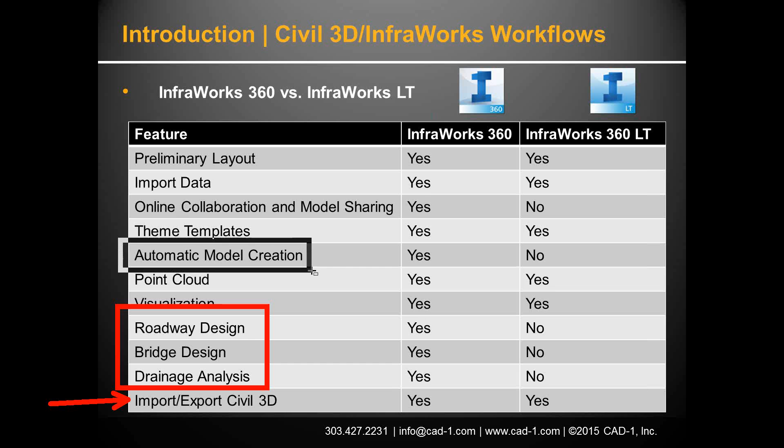Another thing is this automatic model creation - that's the model builder tools. And if you want to share your model with other folks, you have to have InfraWorks 360 for that as well. But we're focusing down here at the very bottom, that last piece, the import-export with Civil 3D, and you should be able to do that with no problem in the LT version.

All right, so let's see where do we want to go from here? What can we do? Well, we've got this two-way workflow. We can go from InfraWorks to Civil 3D - so I can take my InfraWorks model, maybe I'm doing some preliminary layout in InfraWorks, and I want to take that into Civil 3D. I can open an InfraWorks model now in Civil 3D. Additionally, once I've done my final, detailed design in Civil 3D, I can then take that Civil 3D data and push it into InfraWorks. So it is a two-way workflow here.

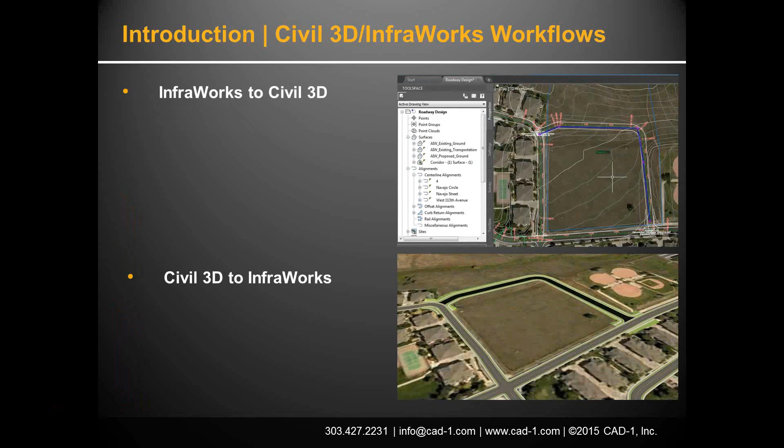So let's talk a little bit about going from InfraWorks to Civil 3D first. Just like everything else with Civil 3D, you want to make sure your settings are set correctly prior to doing this. There's a series of settings that allow you to control how things work as you're importing from InfraWorks into Civil 3D - we'll see those settings. You then simply open the InfraWorks model in Civil 3D; there's a command right there on the ribbon in 2016 that allows you to open it. You'll get this little dialog box, and basically you choose the model.

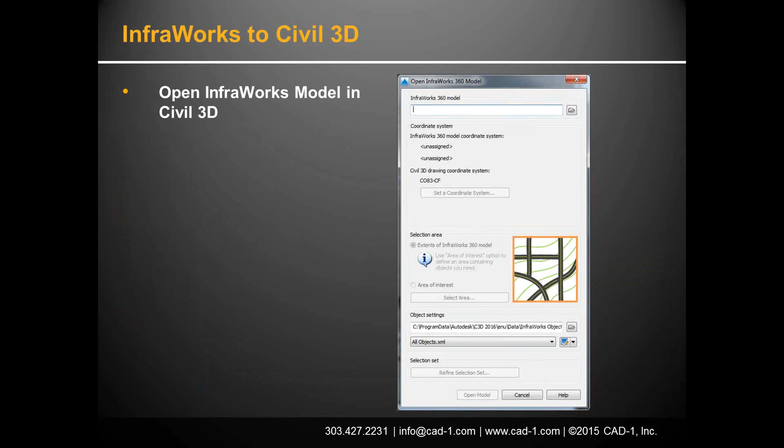You choose your coordinate system, and you choose what it is you want to bring in - whether you want to bring in the entire model or just a piece of it. So let's go ahead and see this, because I'm tired of showing you PowerPoint. I actually want to get in and show you the software.

All right, so here I am in InfraWorks. Here's my model. Let me go ahead and restore a bookmark here that shows you what it is we're going to be bringing in. All I did here is I just kind of sketched up some stuff. It's not a very real design, so to speak - it's kind of hokey, like why would you put a bridge there? There's no way I'd normally put a bridge there, but I wanted a bridge in my model so you could see what happens when it comes in.

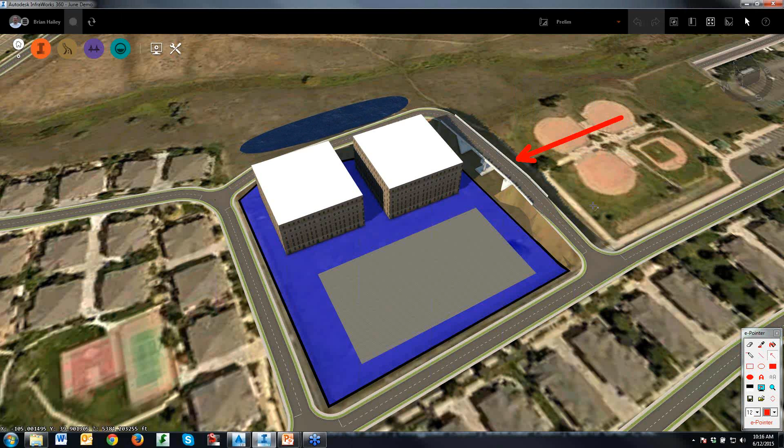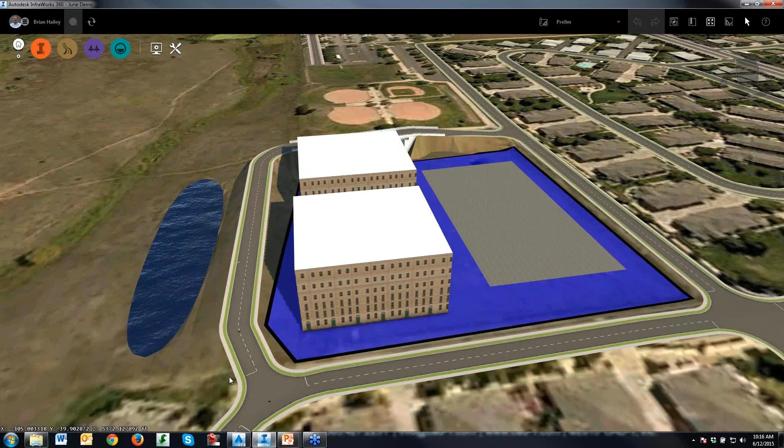I also have a drainage network here, so I just kind of flipped underneath the road here so we can see the pipes. I've got some buildings, I've got coverage areas, I've got a water area over here. So let's see what happens when we bring this in.

Oh, the other thing I've got is I have design roads in here, and I also have the preliminary roads. So the bridges, the design roads - that's all InfraWorks 360. The drainage network - that's all 360 too. The rest of this stuff, you could be done with InfraWorks 360 LT.

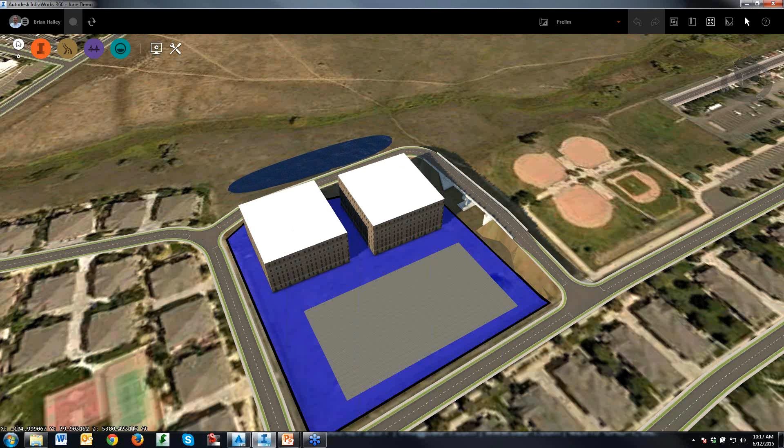So if I want to take this model into Civil 3D, the first thing I have to do is close the model. I can't have the model open and bring it into InfraWorks or into Civil 3D because InfraWorks locks the model. So I'll just shut out of InfraWorks here real quick, and we'll switch over to Civil 3D.

So let me go ahead and start from scratch here. I'm just going to start a brand new blank drawing using the default Civil 3D template. There's nothing special about this template in any way, shape, or form. And I simply want to go in and import that model.

Now, before I import the model, I want to double check my settings. So on the Insert tab, I have the set of tools for the InfraWorks 360 stuff. First thing I'm going to do is configure my settings. Under my settings, it brings up this little dialog box, and basically it says, okay, what data do you want to import? Over here on the far left, I can choose what it is I want to import and simply toggle those on and off.

Once I figure out what it is I want to import, over here on the right, I set it up. So for example, if I'm importing a terrain surface, I click on here and it tells me what type of terrain it is, or the settings in Civil 3D. If I click on this icon, it says, okay, what style do you want to use and what layer do you want to use?

Planning utilities - now, I don't have any planning utilities in my model, so it doesn't really matter, but I can come over here and set this up as well. Design roads, intersections, drainage networks - so I can come over here and set up my drainage networks to do this.

Now, the nice thing about this process is, if you're not familiar with Project Chameleon, this is a pipe network catalog type of thing where the parts are compatible in both InfraWorks and Civil 3D. So the way my parts are in InfraWorks will be exactly the same way that they are in Civil 3D.

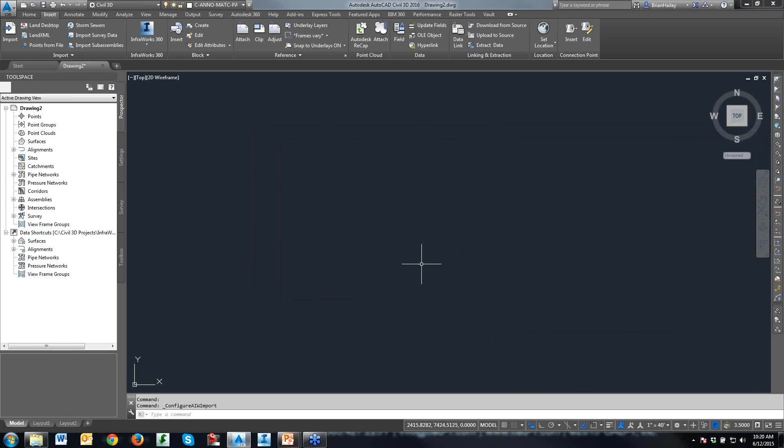And so I just canceled that. There is no... if I were to make a change, I can open up one. For example, the planning objects comes in specific ways. You notice the design stuff is turned off. If I open up the design objects, the planning stuff is turned off.

If I come in here and want to do a save as, I'll save this as Brian's import objects, and say, I want the terrain surface and the planning utilities turned on. I go ahead and save this, and hit OK. Oh wait, I wanted to make a change to that.

I go back into my settings. You notice everything's still back on. So this is not saved in the drawing. If I want to go change it, I have to go open my Brian's objects and then make the changes now. So it's a little different than the way most other things work in Civil 3D. Just to throw that out there.

So once I've set up my configuration, I then simply open up the InfraWorks model. I browse to the InfraWorks model. So here's my model.

It picks up on the coordinate system of the model, so it picks up on the database coordinate system. Honestly, I've never seen any reason to change the database coordinate system for my model. It also picks up on the user coordinate system of the model. This one is still the same as the database coordinate system. If I had changed it, it would have been there.

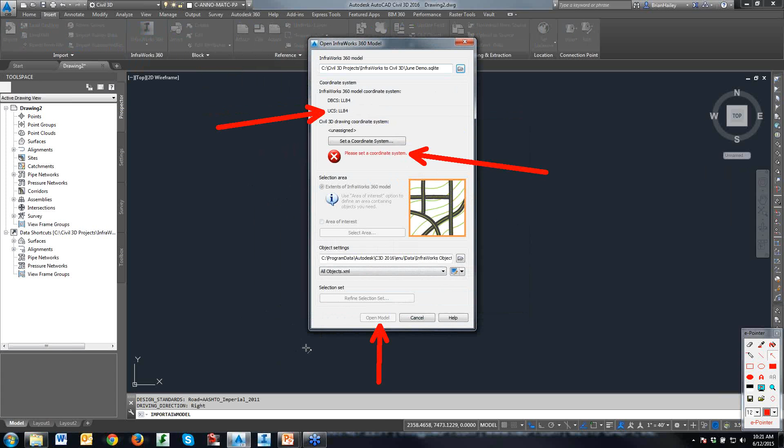But very importantly, your drawing has to have a coordinate system. If you notice, the open model is grayed out. I cannot open a model unless my drawing has a coordinate system. So I'll go ahead and select a coordinate system. I've got two options: I can set it to the same as the user coordinate system of the InfraWorks model, or I can select a coordinate system for the drawing.

So I'm going to go ahead and select one. I know my code, so I'm just going to type it in. CO83-CF, so NAD 83, Colorado State Plane, Central Zone, U.S. foot.

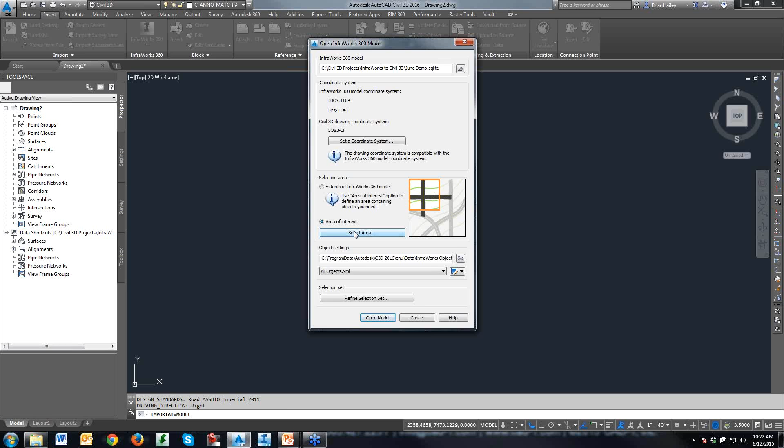And now you'll notice the open model is an option. But before I do that, I want to make sure I get just what I want, so I'm going to tell it, hey, I just want to look at this area. I don't want to bring in that entire InfraWorks model because that's way too much information for Civil 3D. So I'll select my area. It's going to open up the Bing maps, so I'll say yes, I want to display the Bing maps. This white rectangle we see here, that's the limits of my InfraWorks model.

Brian, real quick, and this is a question I have rather than a deep question, but a lot of people ask, why does it use Bing Maps? Can I still use Google Earth Maps and so forth? Do you know kind of what the little bit of the story around that is?

So the official word from Autodesk is that the Google Earth import tools from several years back... Google changed something, their API requirements or something like that, and it's kind of a vague thing. Here's my thoughts on what happened: in order to be able to use that Google Earth imagery, you had to have the permission to do it. And using just regular old Google Earth, you didn't have the permission to use it.

Google went to Autodesk and said, hey, quit giving your users the ability to steal our data. So Autodesk said, okay, we can't do that anymore. Then they went to Microsoft and worked with the Bing folks on an agreement that says, yes, we can use it.

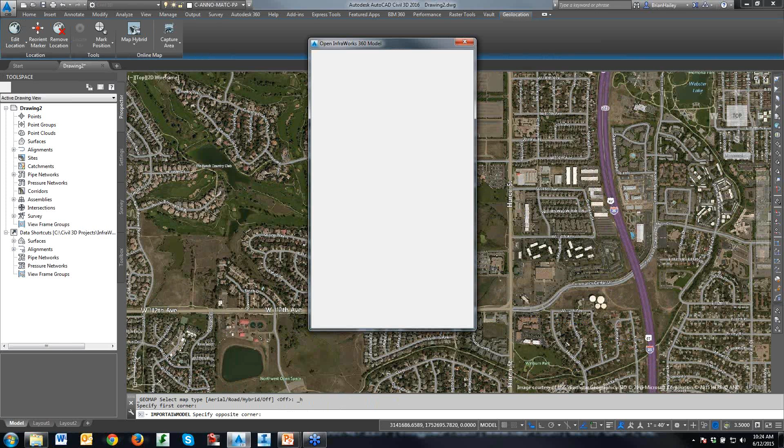So again, I can see this white rectangle, that's the limits of my project. My particular project is right here in this little piece of land, so I'm simply going to draw a rectangle around the area I'm interested in. It's going to go look at that area and figure out what pieces and parts are in there. It takes a moment, not too terribly long though. Hopefully there it'll pop up. Yeah, there it goes.

So those settings that we set earlier, I need to choose which XML file I want to use. I could use the Brian's objects file if I had set that up correctly, but I didn't, so I'm not going to use it. I'm going to use the all objects XML file. If you want, you can edit that file to do your settings here. The selection set - do you want to bring all the types of objects in or just some of them?

So when I click on the Refine Selection Set, it tells me exactly what's coming in here. For example, I'm not interested in this transportation surface or the proposed ground surface, I just want the existing ground contours. All right, the planning roads - I want to bring all my planning roads in. The planning utilities, so you can see this model doesn't have any planning utilities. So I'll go ahead and collect design roads, intersections, drainage networks, coverages, water areas, bridges. Those are all the different types of things we can bring in.

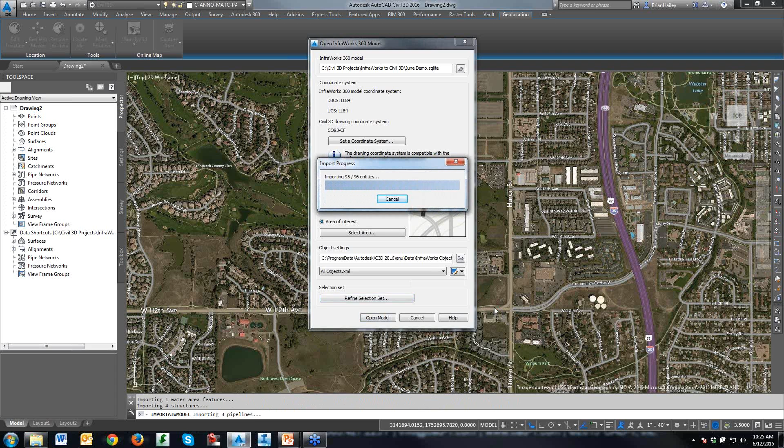So I'll select OK, and then I'll click Open the Model, and it's going to go grab all of those objects and create Civil 3D objects in my drawing for me. Now, Brian, what I'm always amazed at - and those of you out there who understand this - is that it's really pretty phenomenal it's able to do this. It's able to grab this kind of data from one program, bring it into Civil 3D, and actually work with it. Yep, I don't think that catches most people how amazing it is, really.

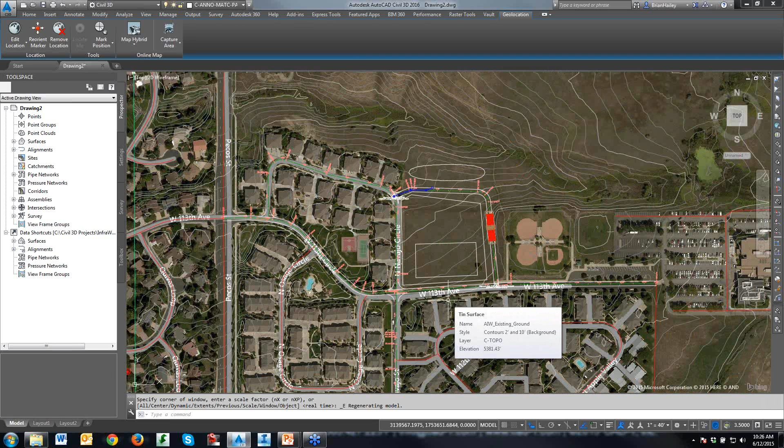Oh, yeah. Now my imagery is still on - after you run this command, the command leaves the imagery on. I personally would rather have it turn off after it's done importing it, so I'm going to go ahead and turn my imagery back off.

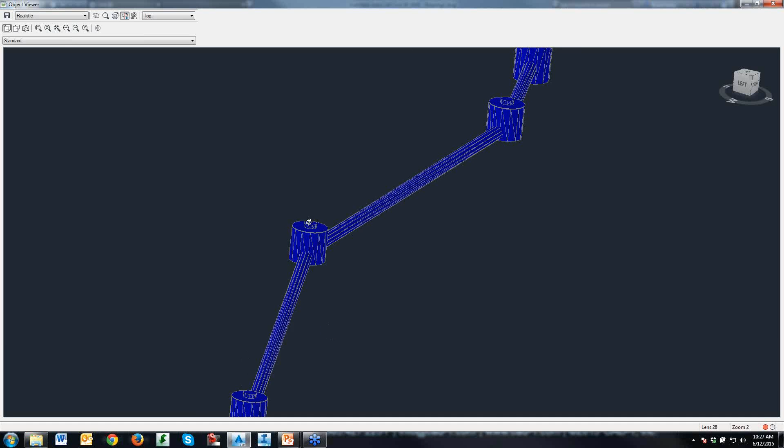So now I can see my surface, I can see my roads, right? This little oval up here, that was my water area. I had some coverage areas in here, and I had a couple of buildings in here. If you notice, buildings do not come in. I had some design roads - the design roads came in and created the intersection. Right, here's my utilities. If I grab my pipe network and pull it off into an object viewer, you can see these structures match what was in InfraWorks. There's manholes, they got the circular lid on them, and up here I had an inlet, it's got the rectangular lid on it. These are just sample parts - they don't have to look this way, but these ones happen to look this way.

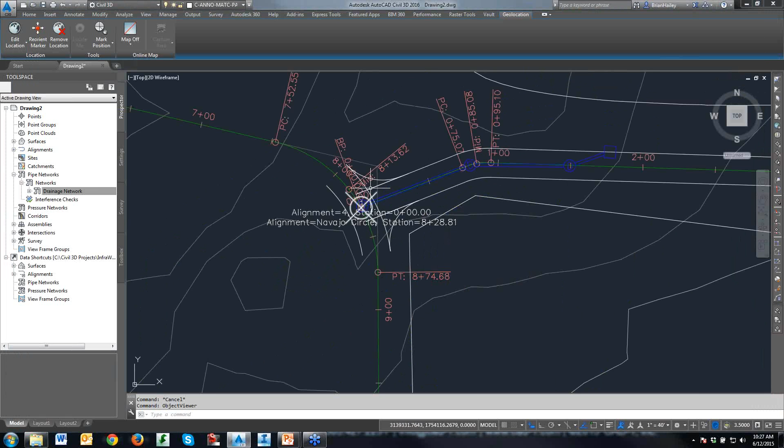Brian, is there a way to bring buildings in, or is it just not there yet? It's not there yet - I don't know if they're planning on adding that functionality or not. If you're really interested in InfraWorks, you can be a part of the rolling sandbox. Every month or so, they bring out a new version of the sandbox that they let people use. So if you're interested in that, you can shoot me an email and I can get you some information on how to join that program. It's basically like a year-long beta, a consistent, continuous beta program.

All right, so here's my bridge. I can take this bridge into a 3D viewer, and you can see the bridge that was brought into Civil 3D from InfraWorks as well. So some pretty cool stuff here.

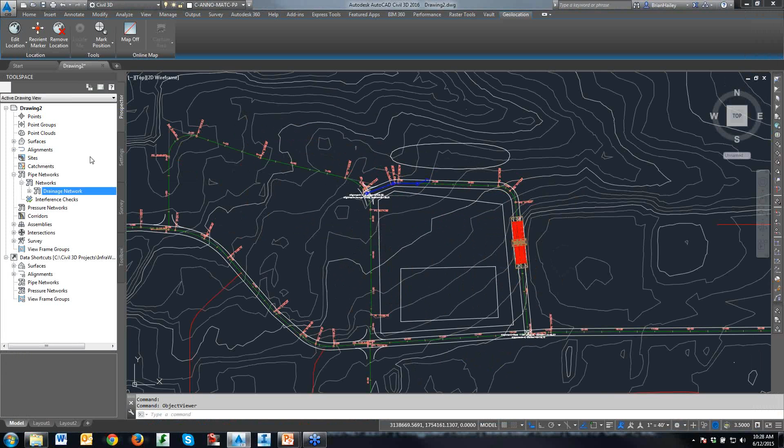So that's going from InfraWorks into Civil 3D. Pretty straightforward, nothing ooh-ah. Another thing I wanted to point out is it brought in all these alignments, those planning roads as alignments. So these are all alignments, but they're nasty - as you can see, I've got all these vertices and stuff, and they're planning roads.

But my design roads did come in with alignment geometry - PCs, curves, those types of things. And they also had profiles. So this is alignment number 4. If I go find alignment number 4, you can see it has a profile and an existing ground profile.

By the way, this existing ground profile is a setting - under the design roads, one of the options I have is to create a surface profile. So that's why that surface profile is created.

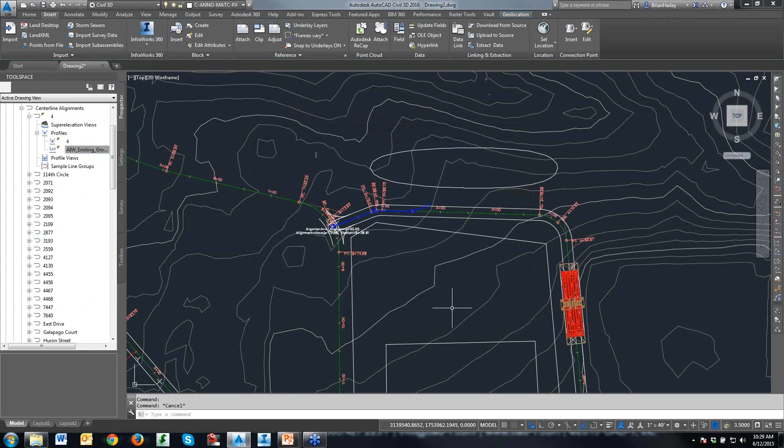Now the bridge comes in from InfraWorks, as Brian said, and it's got some engineering data. It's not a fully engineered bridge by any stretch - that's why you're bringing it into Civil 3D. So when you saw that model, it's something of an approximation, but it's also got a little bit of engineering background to it.

So does anybody have any questions on the process of going from InfraWorks into Civil 3D? Getting any questions? Everybody's either okay with it. And one other thing I wanted to point out here real quick.

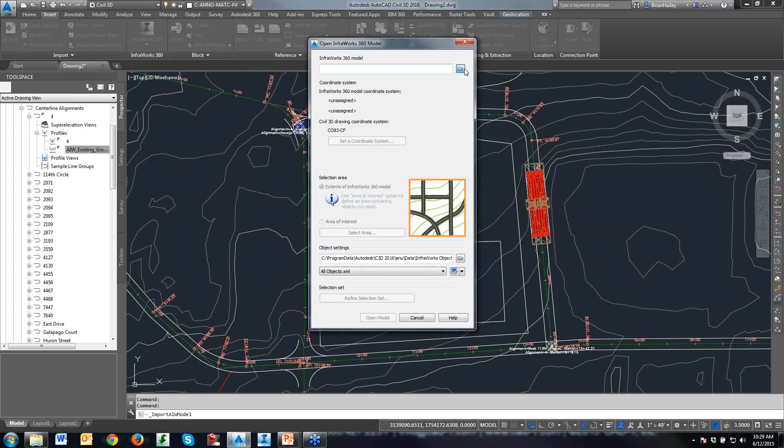When you go to open the InfraWorks model, you don't have to choose the actual model itself. If somebody has sent you an IMX file, you can do the same process from that IMX file as well. So I just wanted to throw that out real quick.

All right, so now I've got my drawing here. I've done my design. Let me go ahead and close this drawing, and we'll go ahead and open up this drawing here. So this drawing has my design in it.

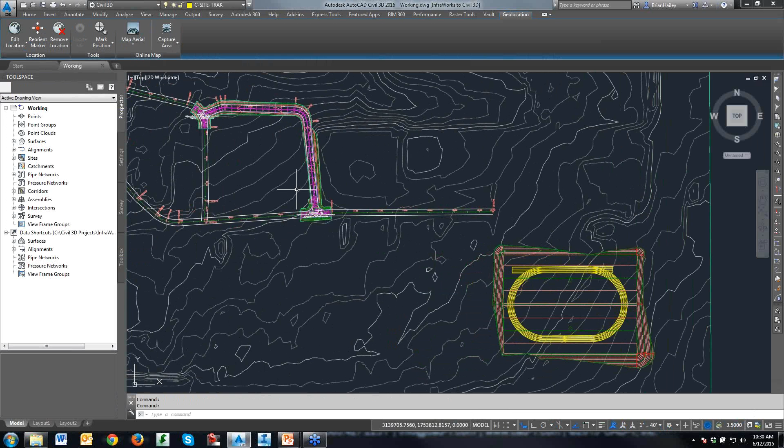All right, so I don't have a bridge in here, but here is my new design road. So it's simply a corridor. I've got a couple of intersections here, and I created a surface from the corridor.

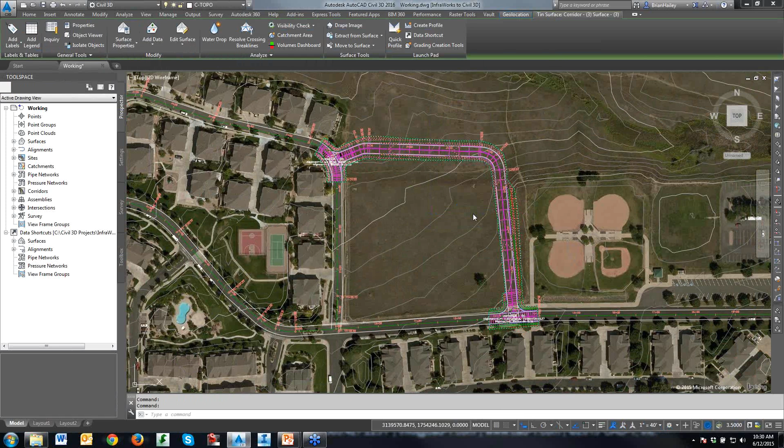So if I grab my little corridor surface here, pull this off into an object viewer, let's change that to shades of gray - you can see I've got a nice little corridor surface going on here.

I've also done a little bit of grading down here - I decided, you know what, we decided to put in a track down here. So I've created this track and did some grading around it. Please, no comments on my design - I did this design in like 5 minutes. So it's at least something, right?

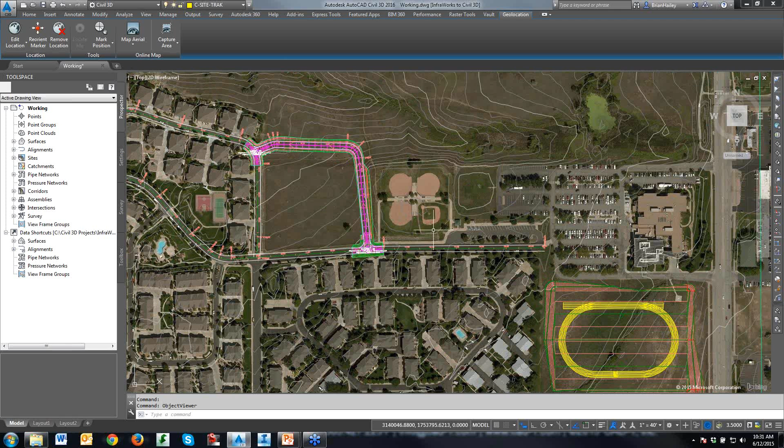But I just want you to see the process when I'm bringing this in. So I've got this here in Civil 3D. I'm now going to go back over to my InfraWorks model, and I want to import this stuff into InfraWorks. Oh, I forgot my PowerPoint - I have all this written up here.

Okay, so now we're going to go from Civil 3D to InfraWorks. When you're bringing the Civil 3D data into InfraWorks, you're bringing the drawing in as the data source, just like you do with a shape file or a DEM file or something like that. It's going to be a data source. And so there is this new Civil 3D drawing data source now.

Once you've brought it in and attached to it, just like everything else, you need to configure the data. And when you configure it, you also get the option to choose the pieces of data from the Civil 3D drawing that you want to bring into InfraWorks - do you want to bring everything in or not? So you can toggle on and off what it is that you want to bring in from your Civil 3D drawing.

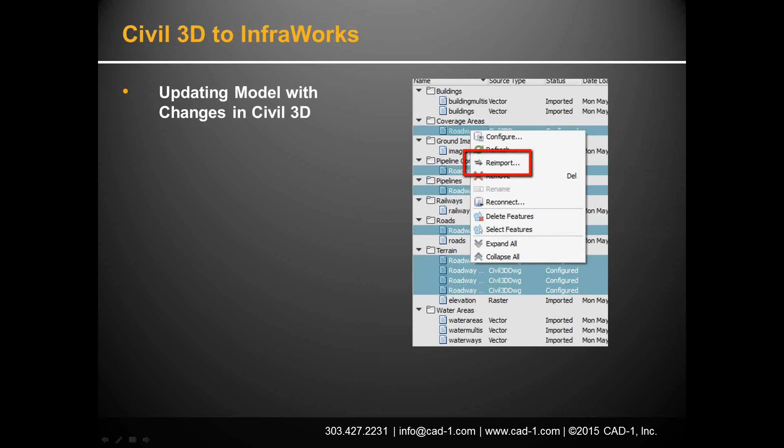Obviously, things change. So what happens when your model changes in Civil 3D? How do you get those updates into InfraWorks? Well, it's simply a matter of re-importing the data. So I can just right-click on the data that I want to update from the model, from my drawing, and just re-import it.

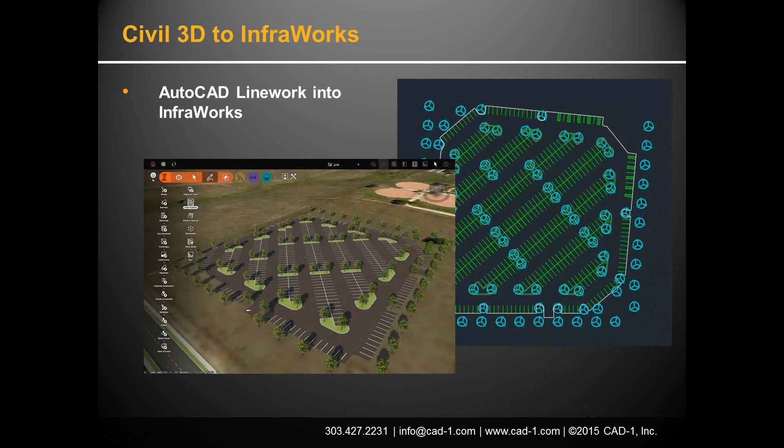How do I get this sort of data into InfraWorks to create something like this? I'm going to do basically the same thing, only I'm going to use AutoCAD for this. So what do we do here? These are the things I'm going to show you today. Let's go ahead and see this.

Brian, before we go over there, we have a question comment from one of our listeners. It says: I do not understand why we need two products to do the work and go forward and backward, and not one extended product. Would you like to address that? I have a few thoughts as well.

Basically, Autodesk created InfraWorks in the beginning as a planning and visualization tool, with the idea that over time Civil 3D, the engineering tool, and the planning and visualization would be useful back and forth. I won't comment because we don't know where Autodesk is taking this, but there's a real possibility that at some point these will blend together or be more contiguous. They just started out as two products. They both have a great deal of use in the industry, and now you're seeing a lot of that use put together. Granted, it's a little confusing why you need two products to do this, but I think there's some logic to it down the road, maybe in another 3 or 4 years.

Hey, you can also think about it like, well, how come I have Microsoft Excel and Microsoft Word? Why don't they make just one big program that does both? Well, it's because the people doing word processing don't care so much about the Excel stuff. Eventually, is it all going to be one big program? I don't know. But that means I have to install it all on my system and manage it, and it becomes overly complex. Would I like to see these two things combined into one type of software? Yes. Are we there yet? No. That's the best answer we can give you.

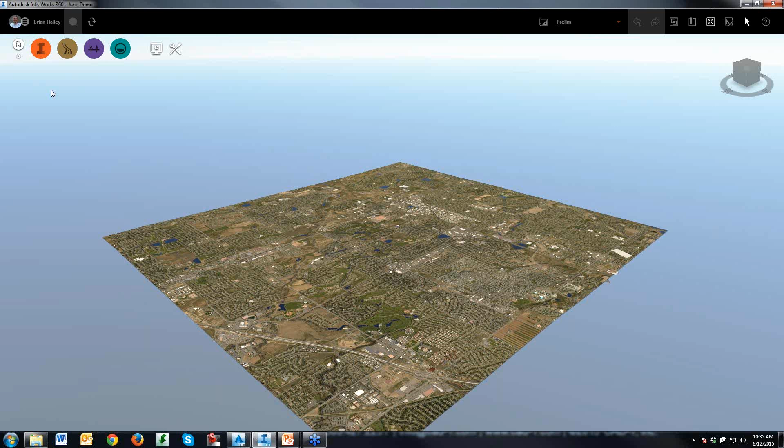All right, so let me go through this. Let me go back over here to my site. I'm going to go ahead and change my proposal, get rid of this preliminary stuff. By the way, when you bring your stuff into InfraWorks, it's going to take the data from the active proposal, so I'm going to go to my starting point proposal here. This is where I'm going to be bringing this data in.

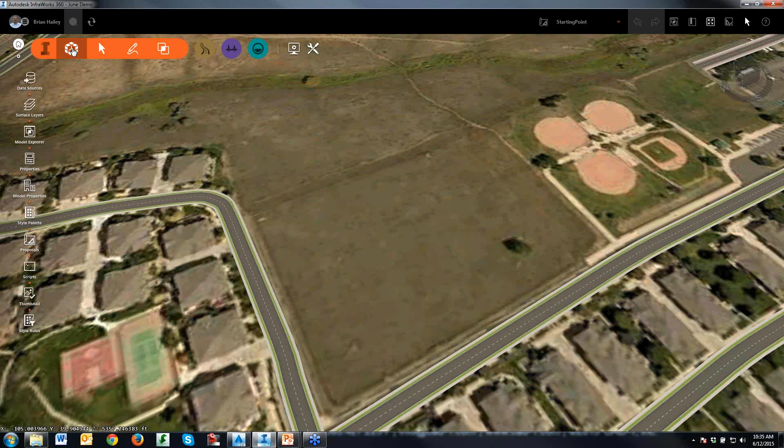So let me go ahead and bring the data in. This, again, is just the InfraWorks 360 LT, so I'm just using the orange one. I'm horrible with colors, excuse me. All right, so I'm going to connect to the data just like I do with any other data source. Excuse me, let me try this again. I'm going to connect to a Civil 3D drawing.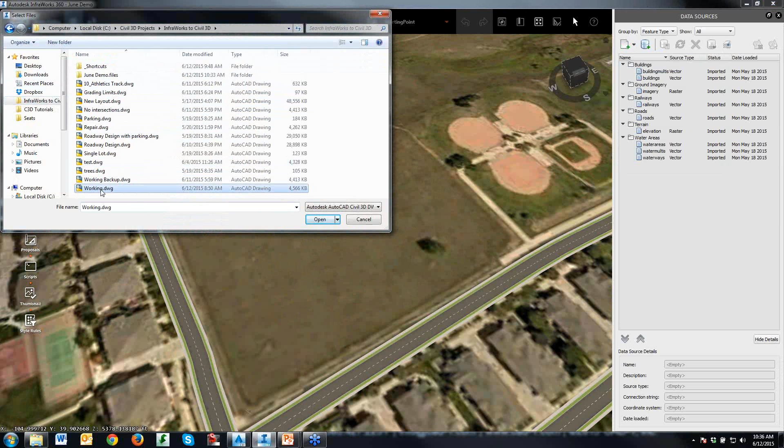So I choose that, and I come down here and find my model. Let's see, it's here, and this is the drawing that has all my design in it, this working drawing. So I'll go ahead and open this up.

Once it brings it up on the right-hand side, first I've got to choose the data - what data do I want to bring in? Now, my drawing was created from an InfraWorks model originally, so it has that existing ground surface in it. I don't want to bring that existing ground surface back into InfraWorks, that would just be silly. So I'm going to go ahead and uncheck that one.

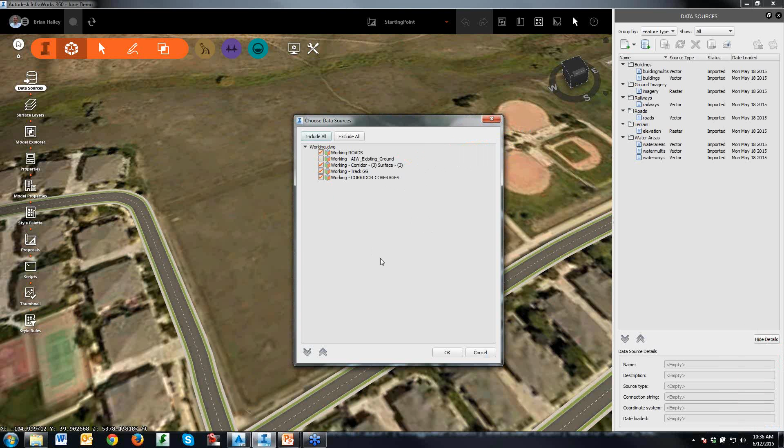I've got some other options here - there's my corridor itself, the track surface, the corridor surface, the roadways. Those are the design roads that I have in that drawing, right? I'll go ahead and select OK, and it populates my list over here with all those pieces of data from Civil 3D.

Now, I always tend to get kind of confused over here because the Civil 3D data is so scattered through this list. This is something I just learned recently: you can change how the data is grouped. So up here I can change it from the feature type to the source type, so I want to filter it by where it came from. Now it puts all my Civil 3D stuff together.

Now you're going to want to come through and configure this stuff, for example the roads, right? So if I bring this in, it's going to bring all my roads in. It's going to look weird, and I'll show you what it's doing here. But for now, I'm just going to go ahead and refresh my Civil 3D stuff.

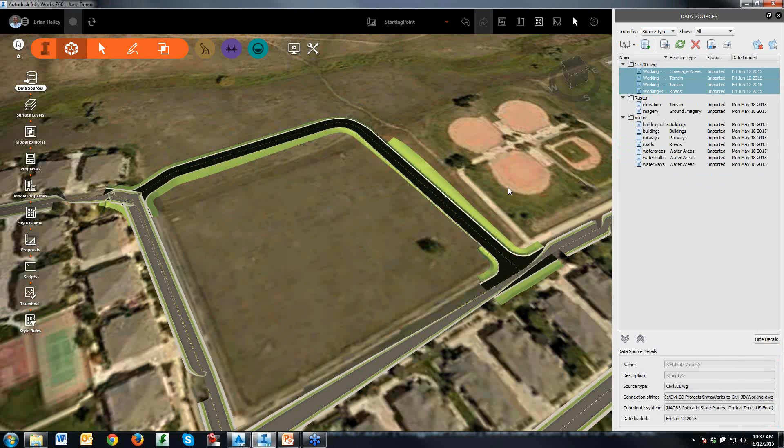And there it is. So as you can see, here is my corridor model. What it did is bring in all these links from the corridor as coverage areas. So this is a coverage area, this lane is a coverage area, my sidewalk or curb is a coverage area, this daylight over here is a coverage area. So it brings them in as coverage areas.

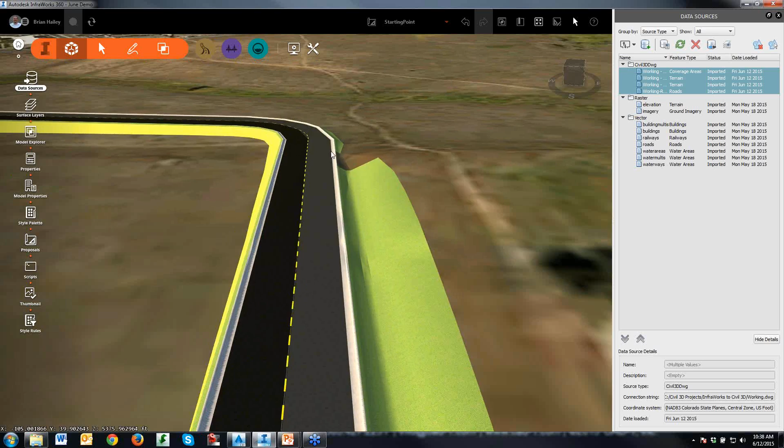But if you notice, this road looks kind of weird. What happened here is I also brought this road in on top of this road. So that's where I need to come in and configure the data. I'm going to go ahead and configure the roads that are coming in from Civil 3D. Oops, I just did refresh, not configure. Let's try this again.

Under the Civil 3D drawing tab, this is showing me all of the roads that are being brought in. West 113th and Navajo Circle are the roads already in my InfraWorks model, so I'm simply going to uncheck those and bring in just my new design roads, in this case, 4. Then when I refresh that, my road looks good because now I don't have another road laying on top of it.

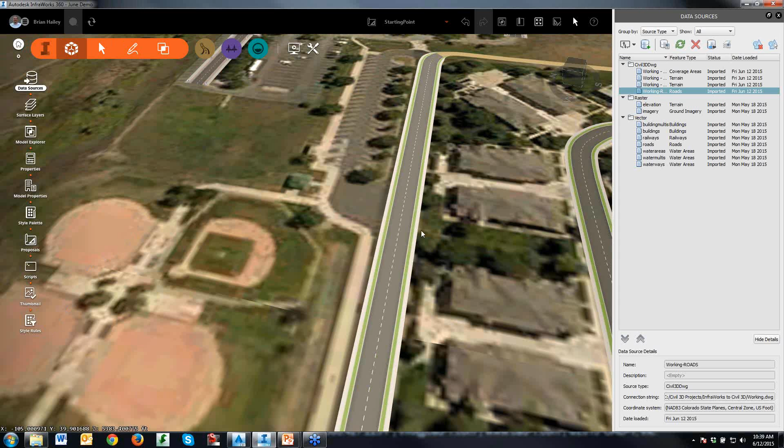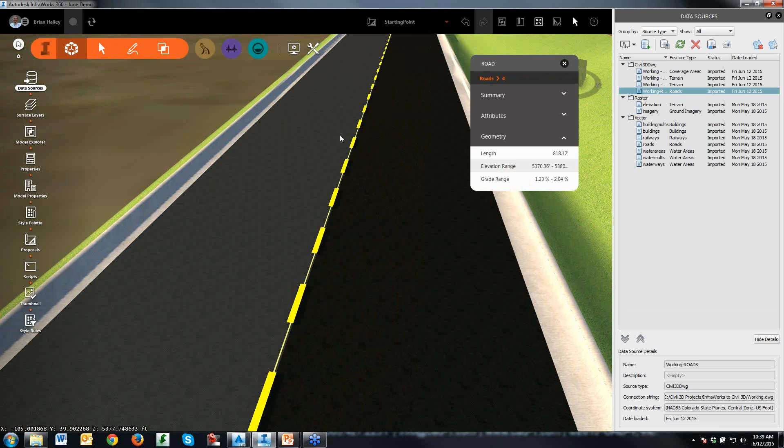But what is this road? If I zoom in here, this is actually a skinny, skinny, skinny little road, and this is basically just where the striping is coming from. The nice thing about doing this little null road is I'm not using the road style in InfraWorks to display my road, I'm using the corridor from Civil 3D to display my road.

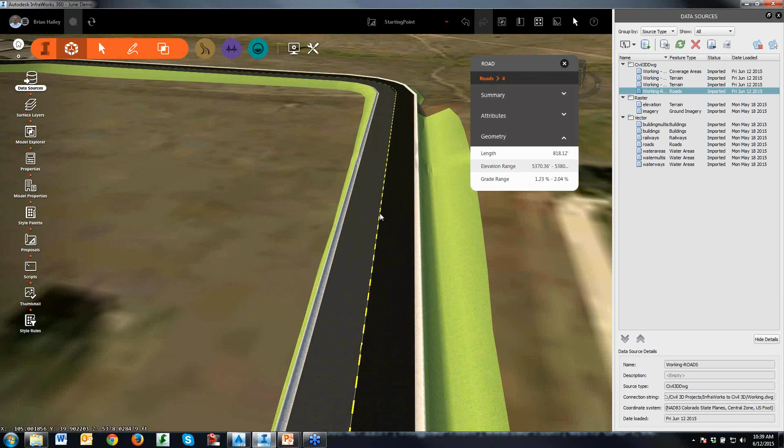But my corridor in Civil 3D doesn't have things like light posts, bollards, or furniture, decorations along it. So what we can do here is go into edit mode on my road—this is a design road, so this is InfraWorks 360 here that I'm showing you. I can edit the style. What kind of style do I want here? Right now it's just using this null style. I have a null road lights style, and this is kind of funky. It's not perfect, but you can see, you can put stuff in here.

Maybe that's not the best design in the world, but I'm using InfraWorks 360, so I can actually add a style zone that says, hey, I want to use this null road from here to there. I don't have those in there now. I can adjust that, and there, that looks better.

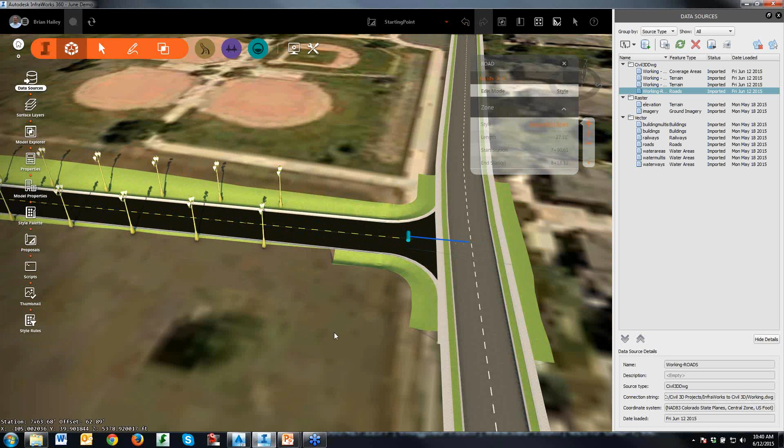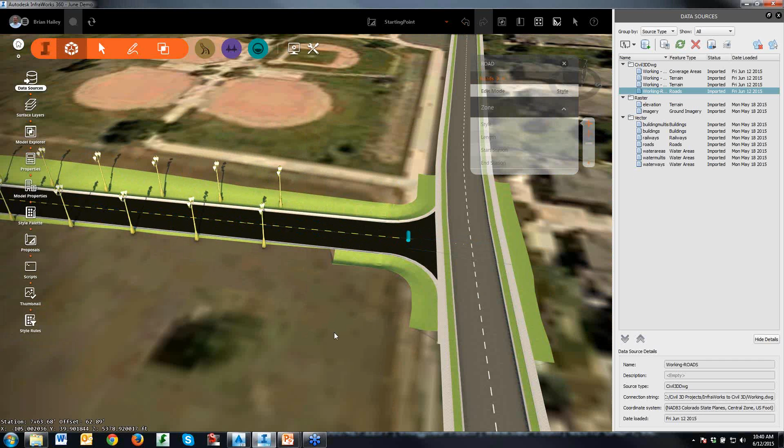I think this is interesting because right now what you're using this for is the link back and forth between the two. You're able to use InfraWorks as a visualization tool, as a presentation tool, as a conceptualization and planning tool, but you're able to now bring in the actual corridor so people can see what it's actually going to look like. You can change the styles very easily and take those back and forth, engineer them correctly. So I'm elaborating on the gentleman's earlier question, but that's the use for it now. And that's a very valuable use in many sectors where you have to show planning commissions, get city approval, get population approval, and so forth. So don't discount it too much.

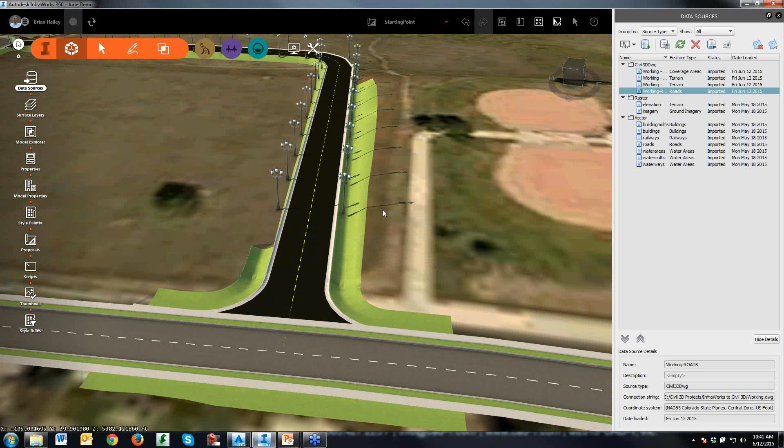The other thing there was a comment about—I'm not asking to bring Civil 3D and Revit together, I understand that, but at the same time you can bring live Revit models into InfraWorks too, so if you want to place your Revit model in there and have it in proximity with the road as it's engineered and graded properly, you can do those things. At some point this stuff's going to blend more and more, but right now, use it for the best advantages you can get. I agree.

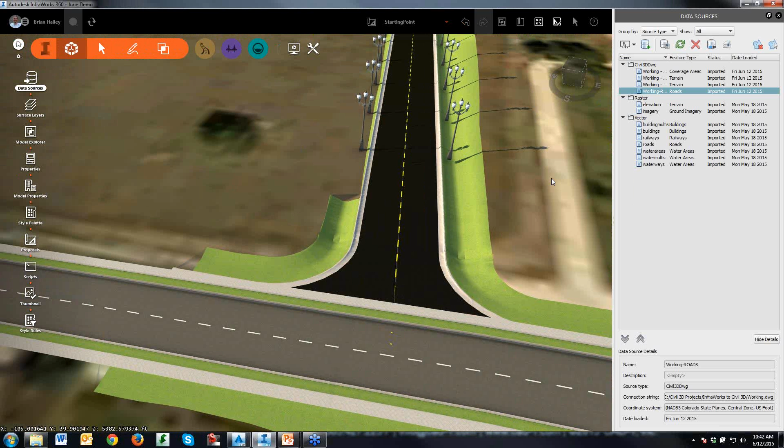All right, so here's my beautiful road, and as you can see, it's very, very black. Maybe I want to distinguish the black to show, hey, this is new construction, where the gray is existing stuff. But in this case, what I'd really like is to see what it's going to look like eventually, where everything's kind of the same.

So what makes this particular coverage black and not gray? Well, that's your style rules. Here I have my style rules, and under my coverage style rules, you can see you get all these rules in here. So these rules basically match this piece of my corridor. It takes this name from my corridor, assigns it as a tag to that coverage area property, and if a coverage has the tag of pave, then it assigns this material here. In this case, you can see it's black, so that's why this is black.

Well, I don't want this to be black. I want this to be more of a gray color. So I'm going to remove the black from my rule, and I'll add in the gray.

So I'm going to go to my materials, my roadways. I'll find a gray. Where's a good one? Is this a good one? I don't want a linear pattern. There's this surface black. We'll do this surface dark gray. All right, I'm going to do that one. I'll go ahead and hit OK.

I'm going to commit the changes to my rules, so I just click on the little commit button down there, and then I'm going to rerun the rules, and now you'll see that it's gray. Okay, maybe that wasn't the best style to use because it's got this little pattern in it, but that's the idea. If I don't like that, I can always go change it again.

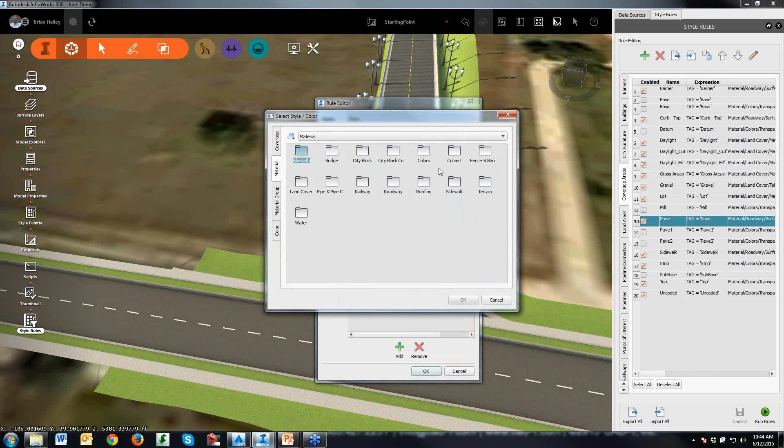Oops, I'm going to pick the wrong one. Yep, pave this one, so I can go remove that. Let's try to add a better one in. Material, roadway. Yeah, let's try this one. I think this one will work better, hopefully. Commit, run the rules. Yeah, that one looks better.

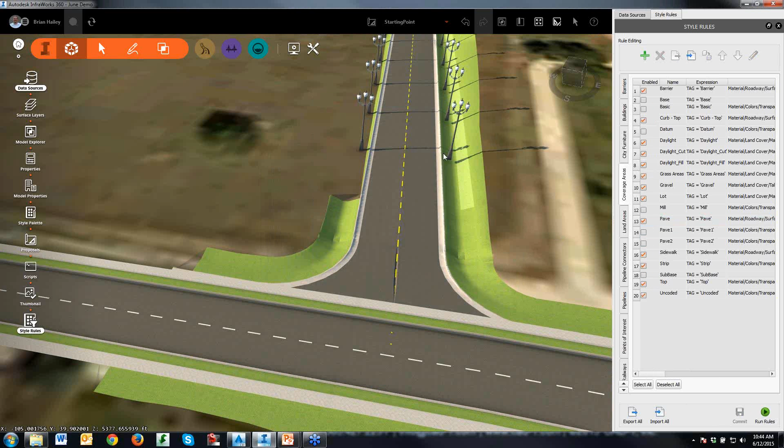And so what's going on here is this was the original layout road that was run in my model, and it's actually running on top of the coverage areas. Right? That's why it's doing it. Right, and it's pretty straightforward to fix.

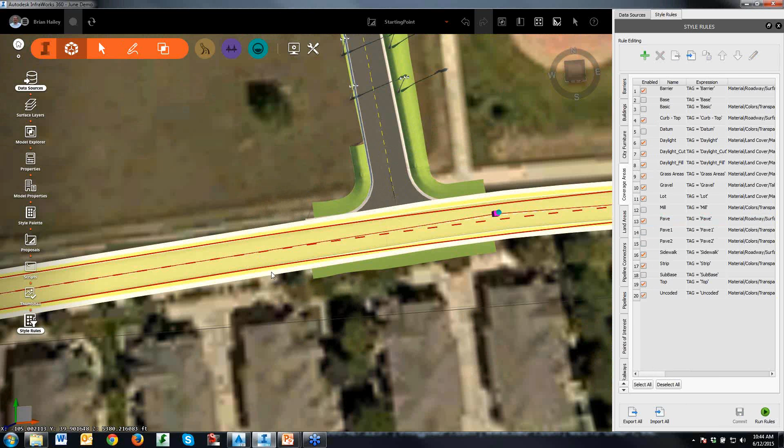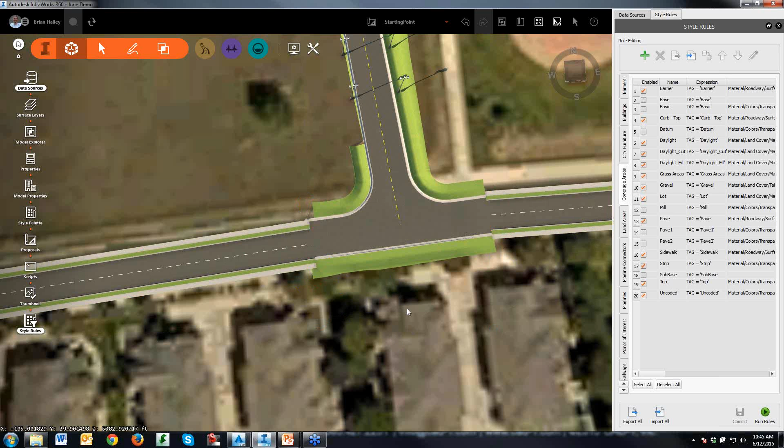What I can do is just right-click here and split the feature, and it splits it in two. Grab this one over here, right-click here, split the feature again. So now I've got three sections, and then I can just delete that little piece there in the middle. Hopefully if things line up a little bit better, then it all works out. And then I can do the same thing down here as well. Obviously, there's still a few little things, yeah, because I'm doing coverage areas and not roads.

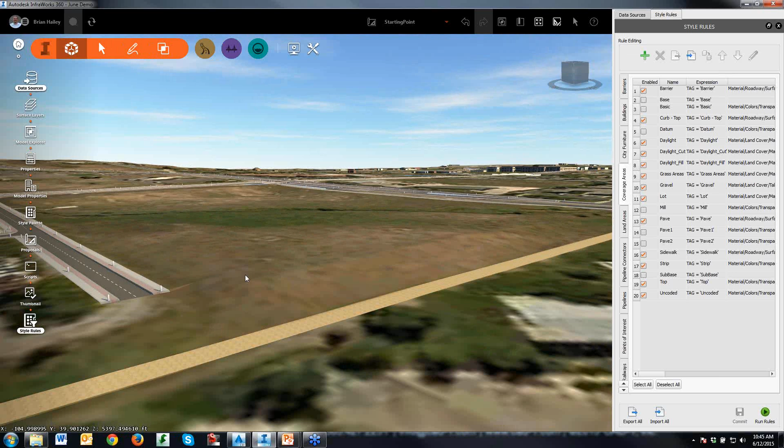All right, so let's see. Let's do the traffic map here. Right? So you can see this flat area running through here. I want to bring in now my track.

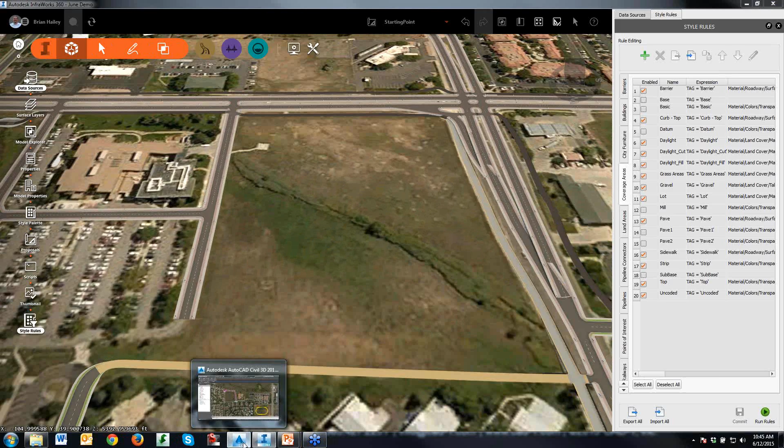So here's the process. Back in Civil 3D, what I've got is I've got polylines. They're just polylines, nothing special here. I've got a polyline that I created out here that represents the limits of my grading. I've got a polyline in here that represents the outside edge of my track. I've got one that represents the inside edge of my track, and then I've got a polyline that represents the striping on my track. A bunch of polylines.

Now, I learned this getting ready for this. If you want this polyline to be a line in InfraWorks, it cannot be a closed polyline. I'll explain why here in just a bit. That's an open polyline.

So what I'm going to do is take these polylines as an SDF file, and the way we do that is through map. There's a command up there in map, so you can change your workspace to the planning and analysis workspace, and it's up there somewhere. I can never remember where it is, but I do know the command to type: it's map DWG to SDF. So I'm going to take my drawing and export it out as an SDF.

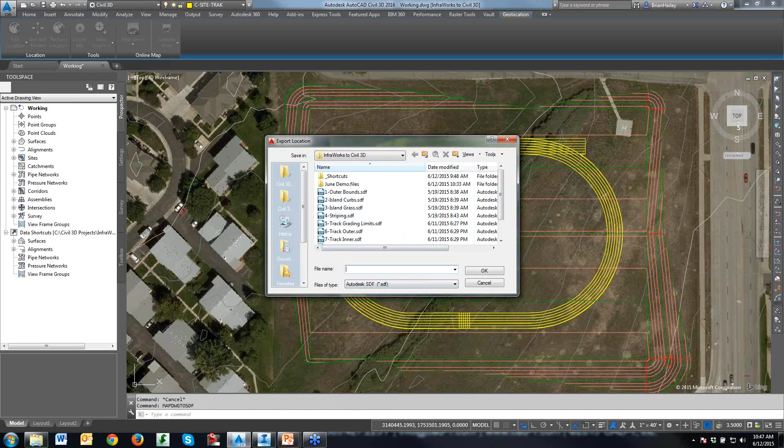Now I've already done this, so I'm just going to demonstrate with that outside line one. So I do this, right? It's going to ask, what do you want to name it? You can see I've already done this several times, so I'm just going to call this one 'junk' because I don't want to use it. What objects do you want to select? So I'll go ahead and select it, and I'll grab that polyline that represents that outside edge.

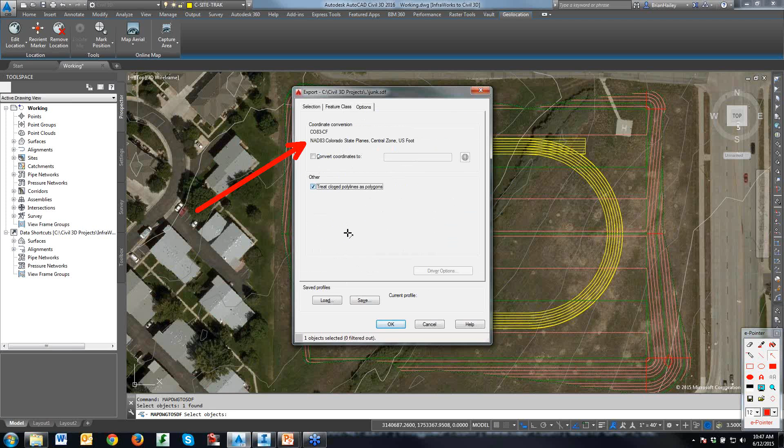In this particular case, I discovered this earlier. Coordinate system, if you want, you can put it into a different coordinate system. I really don't see any reason to do that here because it's just going to go whatever coordinate system to whatever coordinate system, right? Select OK, and it creates that SDF file.

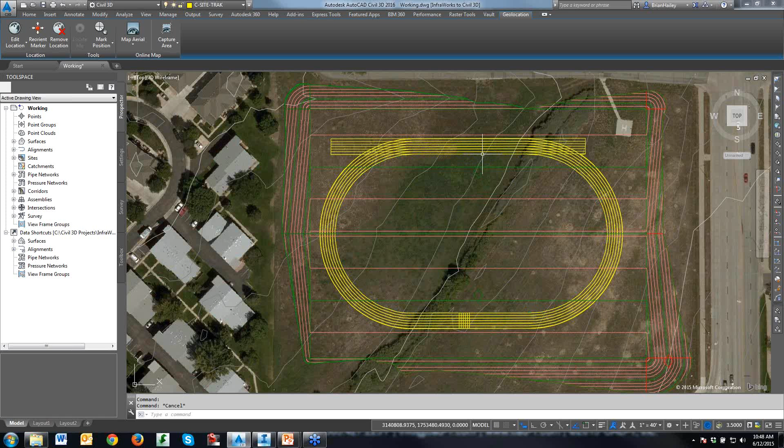So what I did is I created an SDF file for this outside edge, for the outside of my track, for the inside of my track. This one is closed. And then I did one that contained all of my striping, including all this stuff down here.

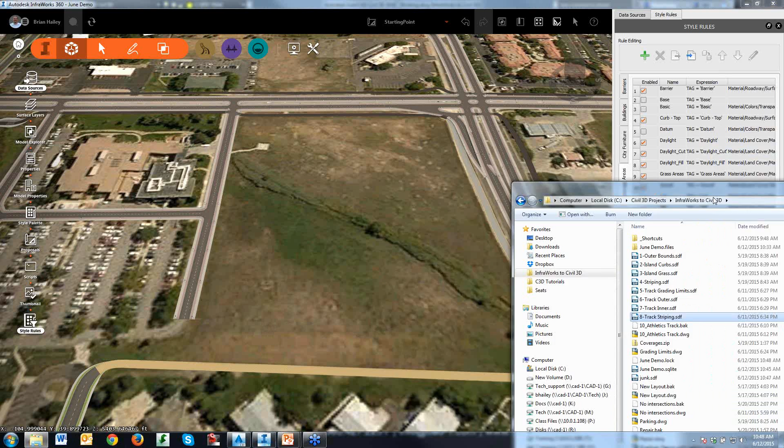So now, back in InfraWorks, I will now want to include all of that stuff. I'm simply going to use Windows Explorer here, and I'm going to drag this in. And the one thing that will help you out is work from the outside in. So I'm going to go to the outside. I simply drag it.

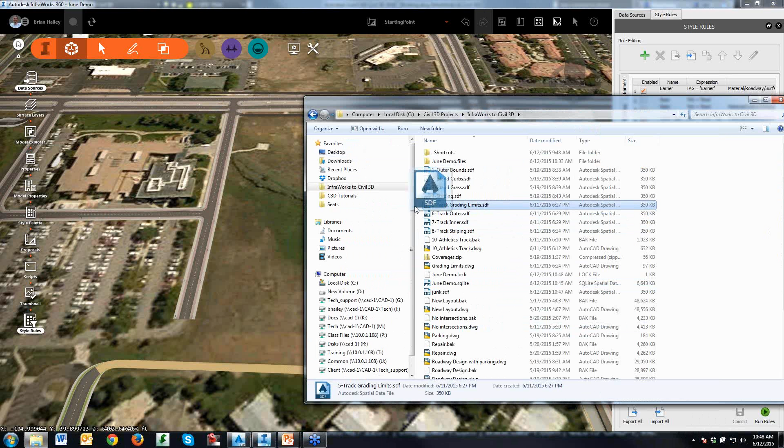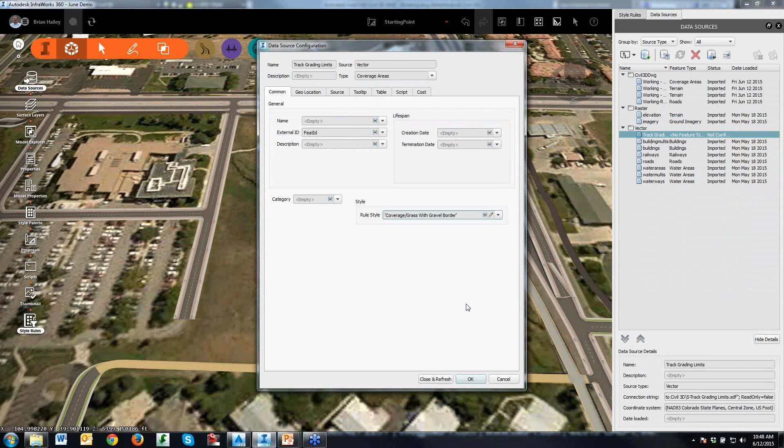So I'm going to configure this as a coverage area, and assign this coverage area style. I'm going to use this grass with gravel border. Close and refresh that, and now I have the limits of my grading here. And now it's a little bit easier to see the actual grading itself in this case.

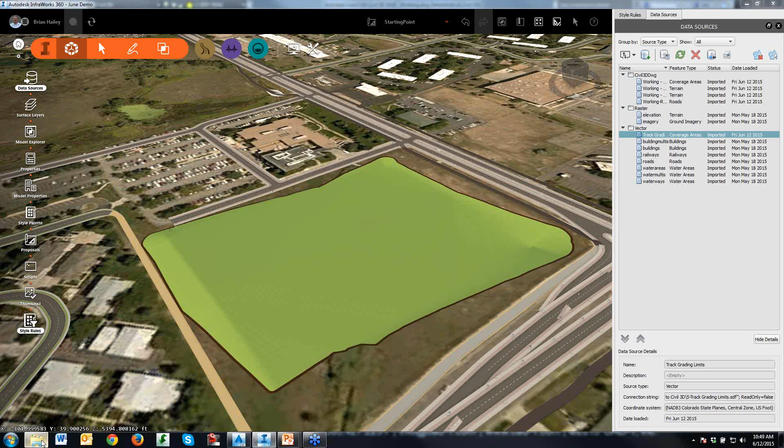All right, and again I just kind of start working my way in. So I have another one here that is the outer track edge. Again, I simply drag this in. I'm going to make this a coverage area, and again assign a style.

Now in this case, I'm not going to assign a coverage style. I simply want to assign a material to it. So I'm going to choose the roadway, and which one do I choose? It's hard trail or something like that. So try and make it look like that.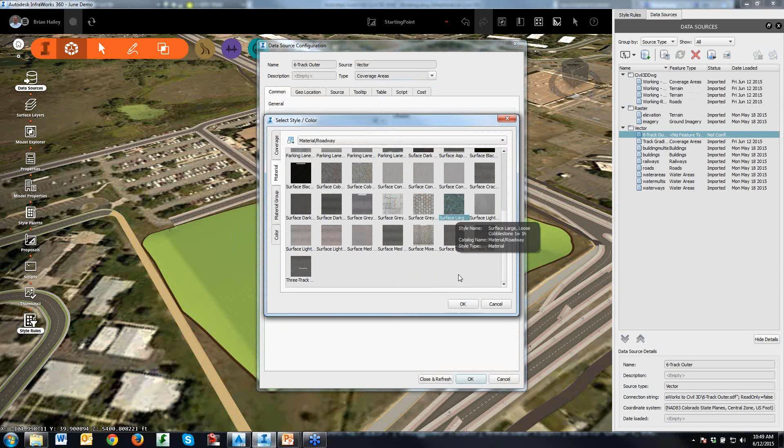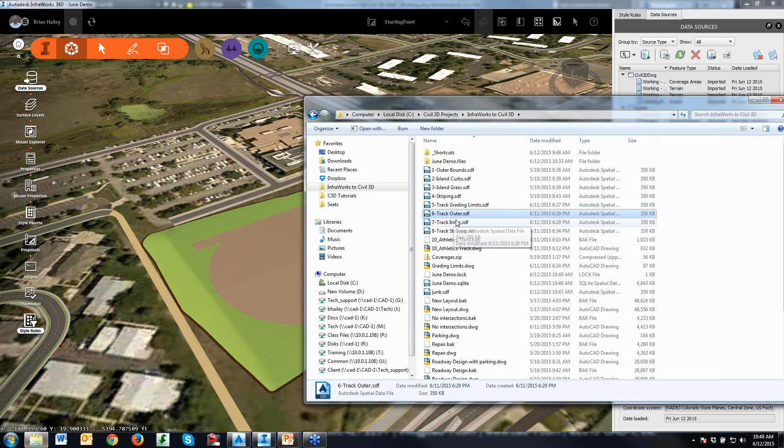And now I'm going to bring in the inside one. So I'll do the inner track. I want this one to be grass, so again I do coverage area, and I'm going to make this grass. I don't want to use that because I don't want the gravel border. I'm simply going to assign a land cover material of manicured grass because that's where they're going to do all the field events.

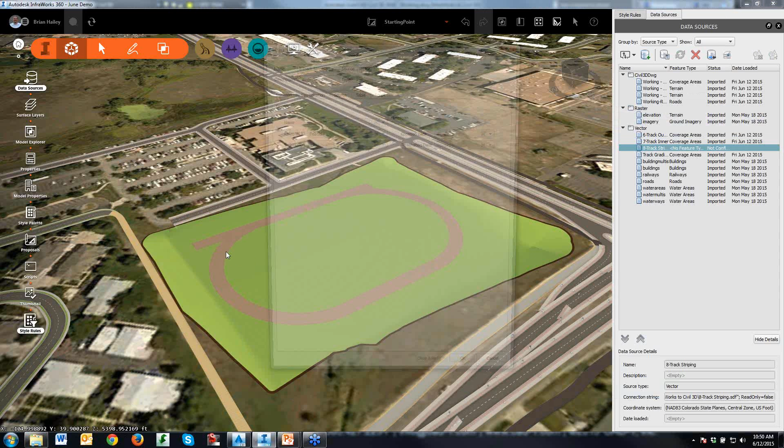My coverage area can't have a hole, so I have to drape these on top of each other. And then finally, I'm going to go ahead and bring in my striping. Now this is the cool one here. So when I do my striping, I'll go ahead and drag this in. Again, I'm going to do this as a coverage area. I know that sounds odd because it's lines, right? But InfraWorks can't have lines.

Go ahead and just say, hey, I want these to be white. Come over here to my materials, assign a white color to these. But before I hit close and refresh here, I want to make sure that these lines have a thickness.

So under the table, and this is the trick for bringing line work from CAD into InfraWorks, is you need to simply assign a buffer width to it. So I want these lines to be, I don't know, say 7 inches thick. Right? So that is going to be a buffer of 3.5 inches to each side.

All right, we seem to be breaking in and out. I don't know what to say. We're apparently having a little bit of trouble with our mics today. And it might just be bad internet connection. There's not a whole lot we can do about that. We are recording this, so hopefully the recording will not be broken up. But or you can listen to it break up all over again. Oh yeah, yeah.

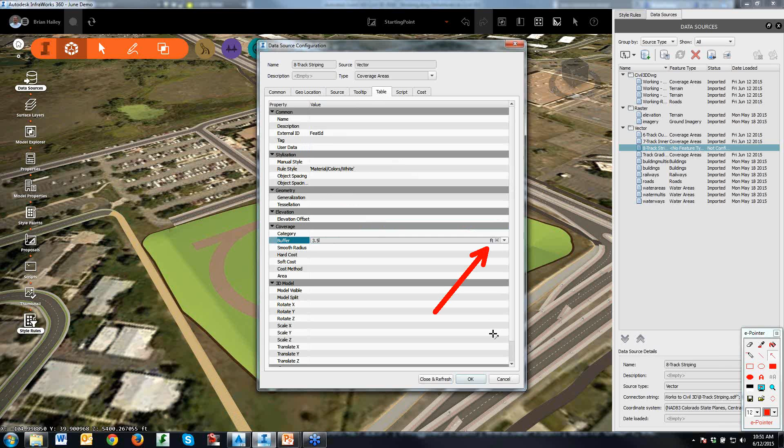So I'm going to assign... I'm going to type in 3.5, but if you notice, it's feet. So that means, let's see, now 3.5 divided by 12, carry the pi, square root. Change your unit to inches. I'll close and refresh that.

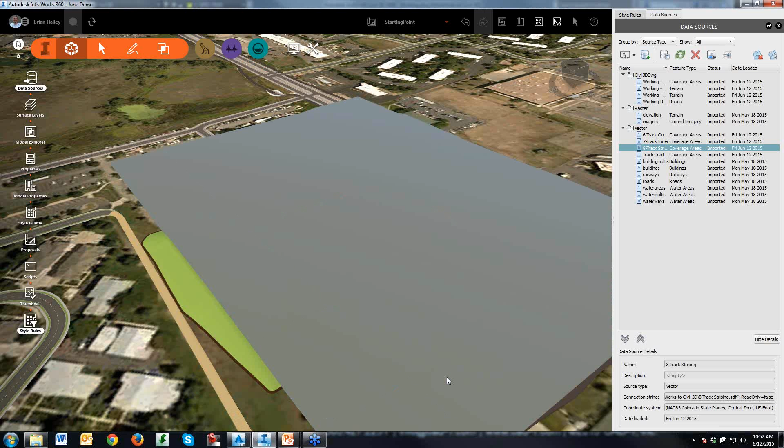And now I have a track with line work in it. He says preemptively, while we're still waiting for it to load. He's confident enough that he knows this is going to work because he just did it this morning too. All right, there it is. There's my track.

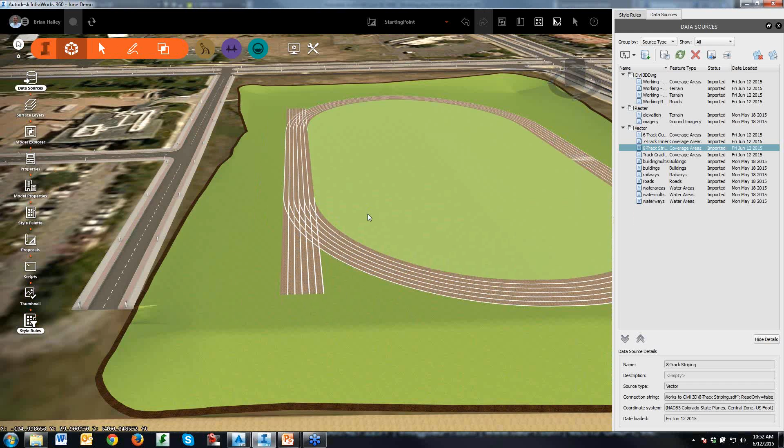It's kind of hokey, but I at least want you to see what's going on here. So I'm going to come back over to Civil 3D, and I'm going to make the change here.

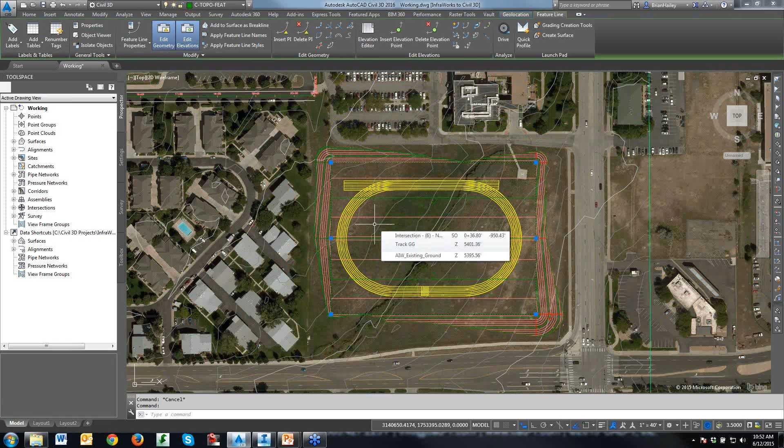I'm going to simply grab this feature line that I used to do this original grading here, and raise it up in the air, quite a bit. I'll go about 20 feet just to be obnoxious. So I'll use the raise lower command, and raise this up in the air 20 feet.

So it's very, very obnoxious. We're grading into houses, right? Parking lot, nobody is going to like this track and field that's way up in the middle of the air.

Now, before I can do any changes in InfraWorks, I have to make sure to save the drawing. So I'll go ahead and save the drawing.

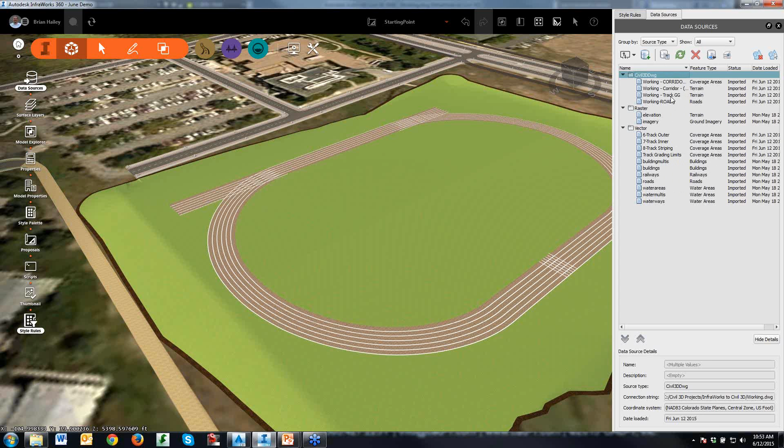And re-import the data. This is where this source type configuration is in place. Let me find what I found here. All right, so I don't want to re-import it all. I just want to do the track grading group surface. I'll right-click on that, and re-import that piece of data, and we'll see the change here in the drawing. Now, my limits of grading isn't going to change because that's just a coverage area, but we should be able to see the grading change.

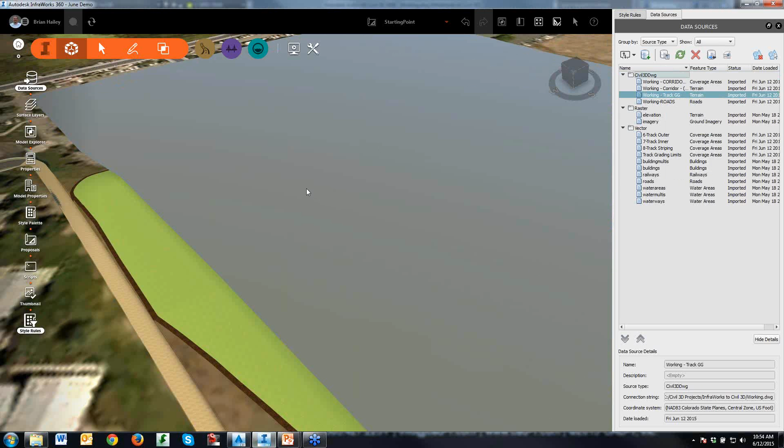So now I've got this nice hill where my track is.

And I apologize, I hope I don't mess up your name too badly, Harold Poultry. That's the first thing, we have some usage of it, cost of it, and so forth. It may not be acceptable, but this is what you have to work with now, and if it can be of use to you, well, wonderful. It sounds like you are using it for some good things. But at least you have these tools to do much more accurate presentations, much more accurate studies back and forth, and we'll see what the future holds with it.

Yeah, I think it's pretty exciting technology personally. And that pretty much wraps up what we've got for this presentation.

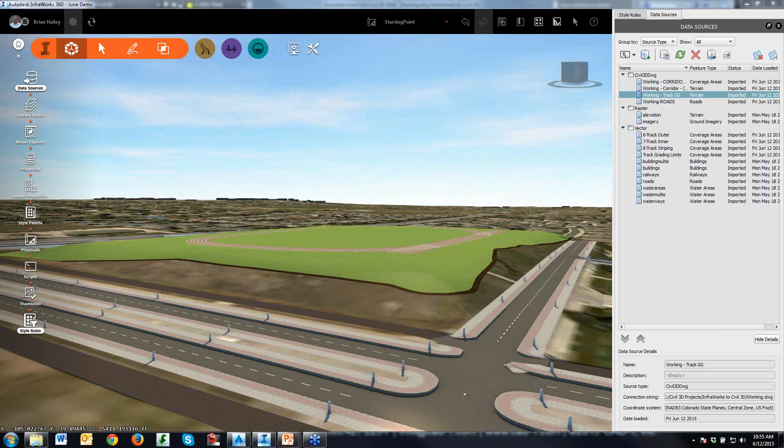Do polylines need elevations, John asks? Oh, that's a good question, John. So John asked, back here in Civil 3D, do these polylines need to have elevation? This is a surface, and these are just 2D polylines.

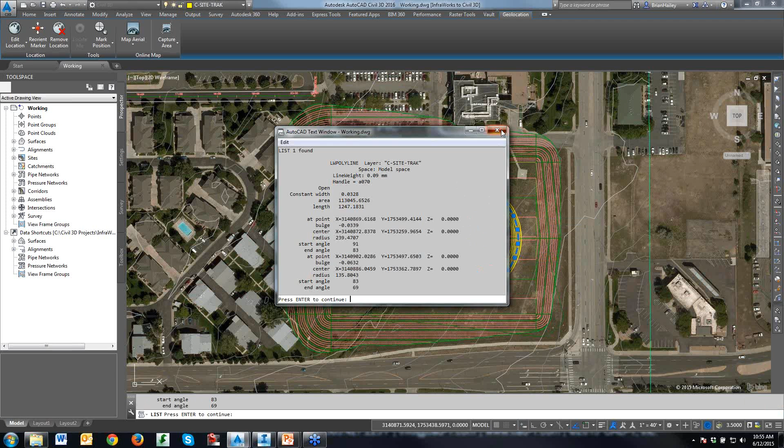Are in fact at 0. So the polylines do not need elevations. When you bring in a coverage into InfraWorks as a data source, it by default drapes on the terrain. So this is just draping on the terrain, and I don't have to worry about elevations for this. So that's a good question, John.

All right, do we have any other questions before we call it a day? All right, we have a couple minutes left, and doesn't look like we're getting any.